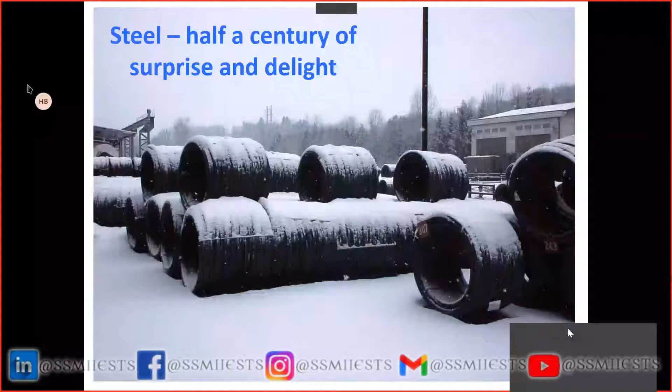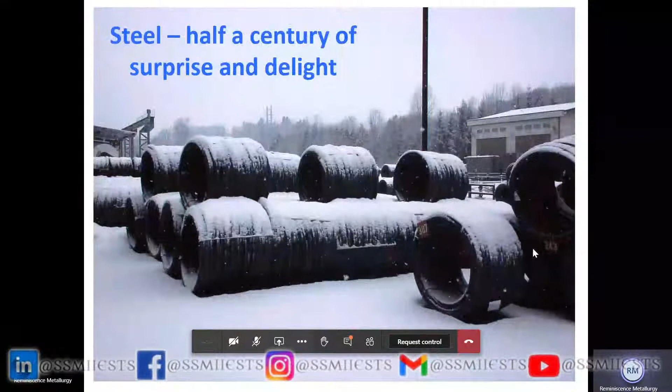Could you change to the next slide, please? I am trying, sir, but it's not moving. Let me try. Yeah, I can see it now. And if you put it on full screen.

Before I mention more recent developments, by far the largest development in steel was in the 1960s, early 1960s, in Sheffield, where microalloyed steels were invented by these characters: Terry Gladman on the left, and Irvine, Pickering, Irani, and Bob Morrison. These people invented a concept at a time when there was no industry for niobium, and they created the industry for niobium by showing that a very small concentration of a microalloying addition can dramatically change the combination of strength and toughness in steels. There are now approximately 40 billion tons of steels which are microalloyed in routine use, and they are so good that they do not fail, and therefore the public doesn't know about them.

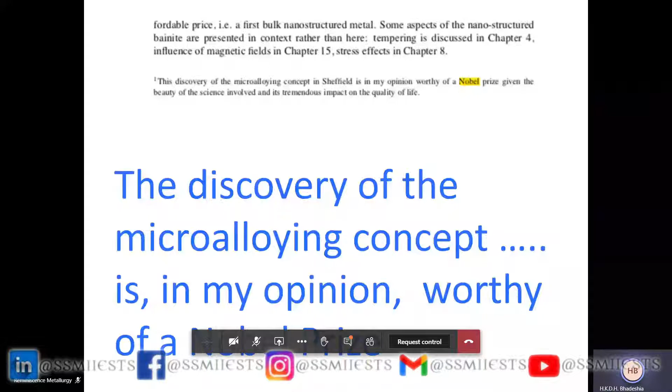This particular discovery of microalloyed steels, in my opinion, and I wrote this down in one of my books, really should have won a Nobel Prize. Because if you look at many of the Nobel Prizes we get nowadays, they don't actually create something which influences the lives of so many people. Whereas the microalloying steel concept really changed the quality of life for a very large number of people in a very big way and completely reliably.

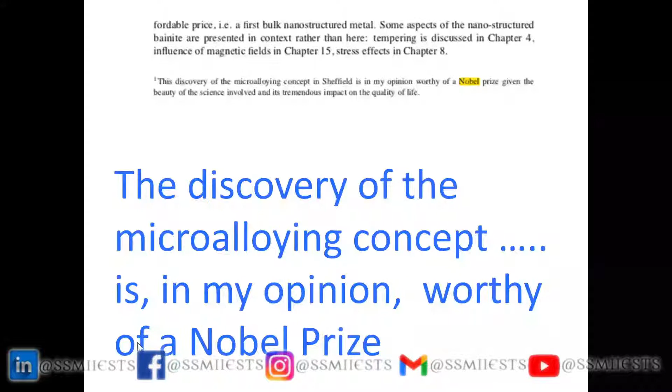Okay, next slide. Now I'll go into a few examples. Just when people think that steels have run out of ideas, this particular concept came about.

These are the twinning induced plasticity steels, where you start off with quite a small strength of the order of 300 megapascals, and then there is a work hardening mechanism which leads to a strength in excess of 1 gigapascal and an elongation of 60%. That is really quite remarkable - an elongation of 60% and a strength of about 1.2 gigapascals.

The mechanism of this work hardening is interesting. The steel contains a very large amount of manganese, and therefore it is a fully austenitic steel. It starts off deformation by mechanical twinning. Here you see a transmission electron micrograph showing extremely fine mechanical twins. This scale bar here is 1 micrometer.

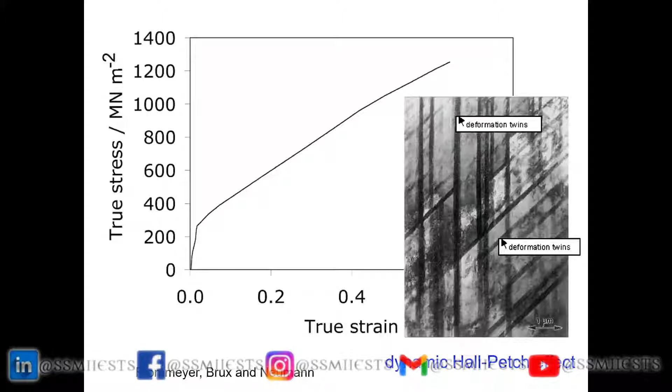What happens is that just as when we refine the grain size we get a greater strength, these twins partition the austenite into smaller and smaller compartments as deformation happens, and therefore they produce strengthening by dynamically refining the grain size. We call this a dynamic Hall-Petch effect, where the islands of austenite are divided into smaller and smaller sections by these twins. So this is the TWIP steel concept.

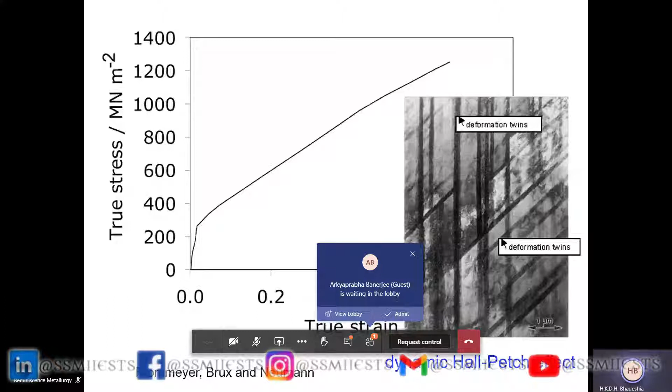If we go to the next slide, the properties are really quite amazing. On this plot, we are plotting the impact toughness versus temperature, and you can see that there is no ductile-brittle transition temperature, and even at minus 150 degrees centigrade, it has a toughness of about 100 joules on a standard Charpy notched test.

Furthermore, it has a lower density than a normal steel - about 7.3 grams per centimeter cubed as opposed to 7.8, because of the addition of silicon and aluminium. It's fully austenitic, and even at very high strain rates it behaves very well, maintaining its good toughness and elongation.

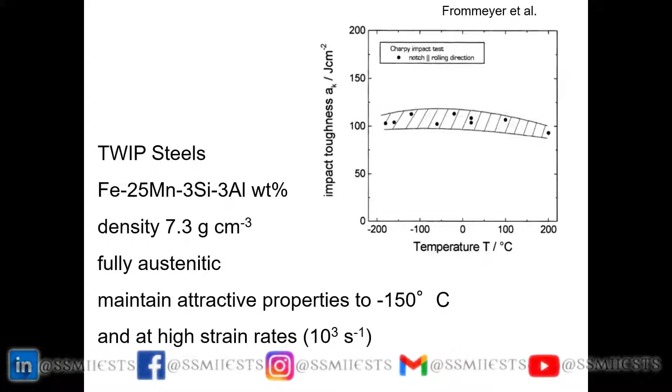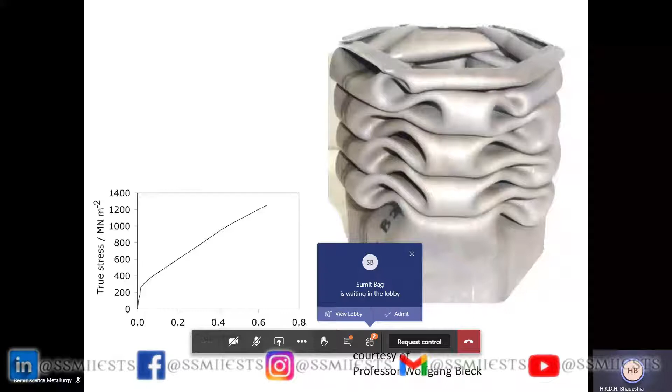Now this is a movie. The cylindrical elements that you see in the middle are made from TWIP steel. The idea is that when compartments of trains collide, the cylindrical component is extruded through a die, and therefore you get uniform deformation all across your component.

I don't know whether you can play the movie or not. Okay, if not, we can continue. So basically, there's an engineering solution as opposed to a material solution that allows a TWIP steel to absorb a great deal of energy during deformation. So we can move on to the next slide.

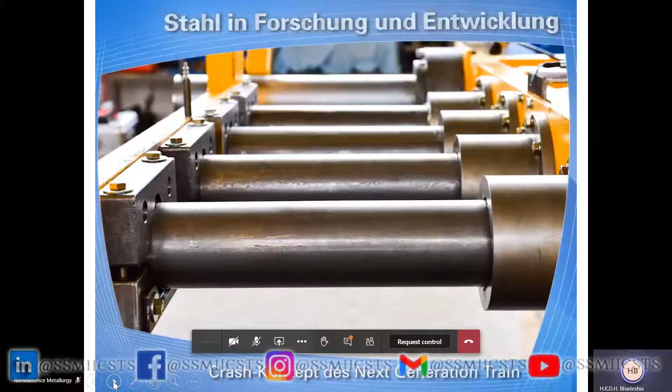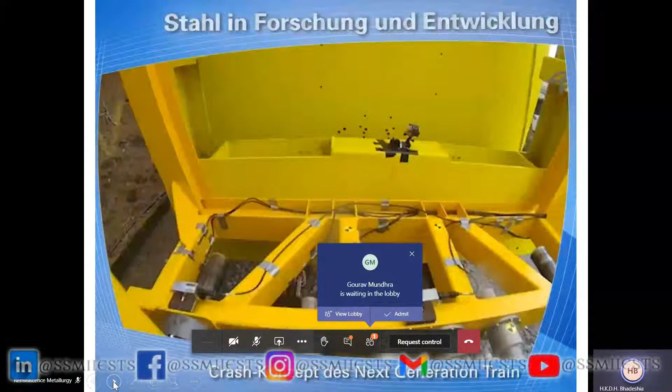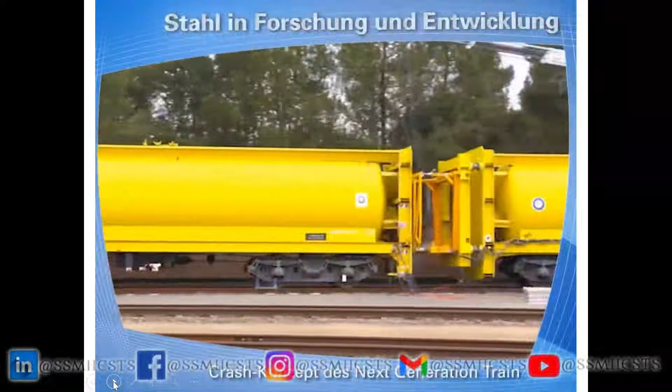Okay, so this is showing the extrusion of the cylindrical component, and this is an actual crash test. You can see those cylindrical elements made from TWIP steel being extruded into much smaller diameter during the crash. That gives uniform deformation, and therefore you exploit all of the stress-strain curve of the TWIP steel. Okay, next slide.

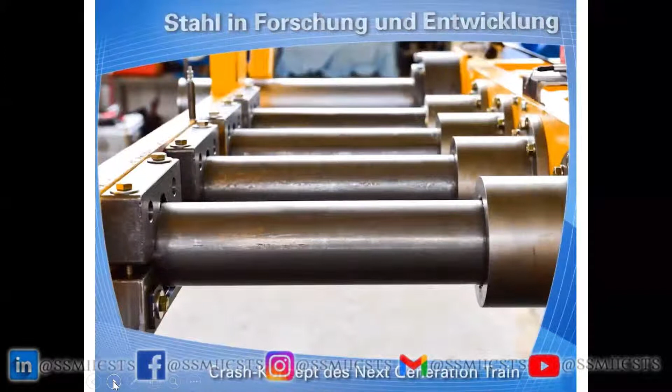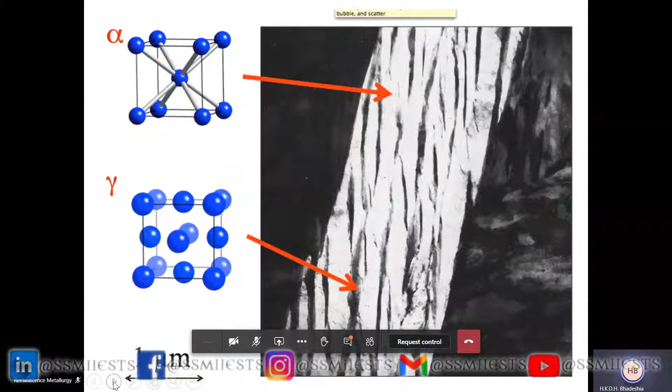You've already seen that austenite does not have a ductile-brittle transition temperature, so it's very good for toughness, whereas the very fine plates of bainite, a consequence of the mechanism of transformation, provide strength. This particular microstructure has no carbides at all, because quite a lot of silicon has been added to the steel, and silicon retards the formation of cementite. This concept has found applications in a large number of scenarios, and I'll mention two of them. But before that, I want to show you a movie explaining why these plates are extremely thin. If you go to the next slide.

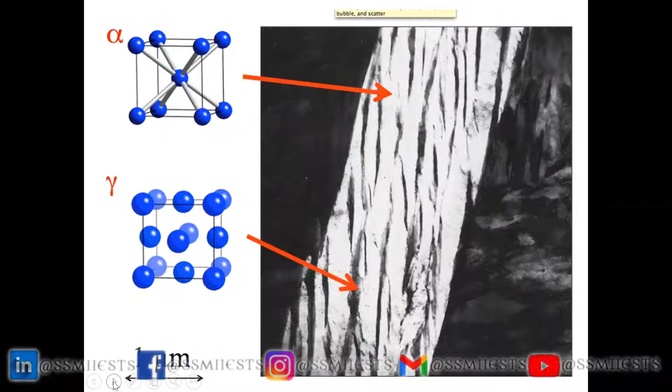If I take a sample of austenite, polish it completely flat, and allow it to transform into bainite, you can see it produces quite severe deformations. These deformations have a special characteristic: they involve a very large shear deformation. In order to minimize the strain energy associated with the shear deformation, the bainite plates form as very thin plates compared with martensite, for example.

Martensite plates generally grow all across an austenite grain, and therefore tend to be coarser. These bainite plates are only a quarter of a micrometer in thickness—just imagine getting grain refinement to a quarter of a micrometer without any imposed deformation. Processes like equal channel angular extrusion and severe plastic deformation aren't terribly useful for making a commercial steel because they focus on very small quantities of material. Here we're getting grain refinement to quarter-micrometer size simply because of the mechanism of transformation.

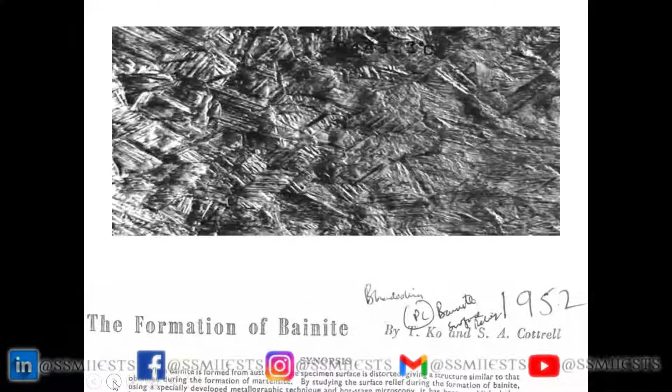If you go to the next slide—so this is a Swiss steel. We had a collaboration with them to work on this mixture of bainitic ferrite and austenite. This is an actual component for fuel injection, made from the bainitic steels, because you can engineer the properties: you can vary the thickness of the bainitic plate, you can vary the retained austenite content. So it basically opens up opportunities for very many applications.

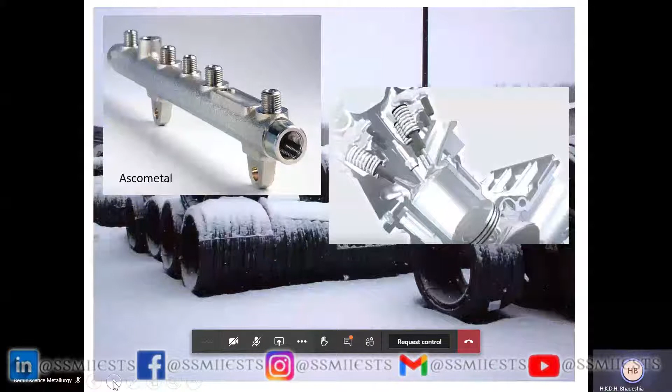And if you see the next picture, this is another actual component made from this combination of bainitic ferrite and austenite. People think of cast irons as being very brittle materials, and that's true if you have flakes of graphite and lots of cementite and so forth. But the same concept of a mixture of austenite and bainitic ferrite has been extended to cast irons as well.

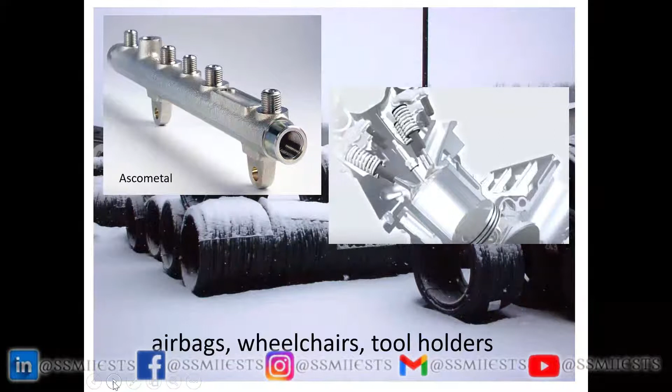So we need to go to the next slide. Here you see what's known as Austempered Ductile Iron. There's a large lump of graphite there, but the matrix has been transformed essentially into a mixture of bainitic ferrite and austenite. This cast iron—remember, this is cast iron—has a toughness of 120 joules at room temperature and a strength in excess of 1100 megapascals. This has opened up many opportunities to make complex components simply by casting, such as the component illustrated underneath.

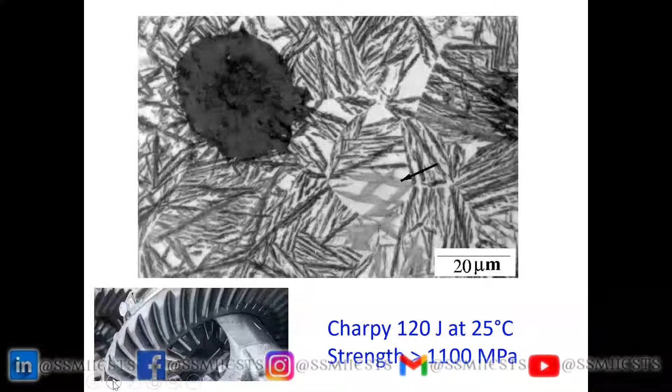This mixture of bainitic ferrite and austenite can be controlled. The various parameters that define the microstructure can be controlled very easily by altering the alloy chemistry or by altering the transformation temperature. And there's so much understood about this that you can actually do calculations. You don't need to do trial and error experiments to redesign the scale of the structure.

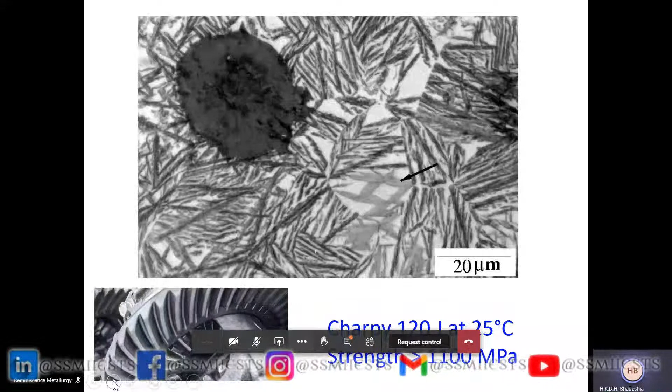If you go to the next slide, this is the world's first bulk nanostructured material. It can be produced in thousands of tons, and it consists of these bainitic ferrite plates, which are only 20 nanometers in thickness, and they are actually finer than the carbon nanotube that you see on the top right-hand side.

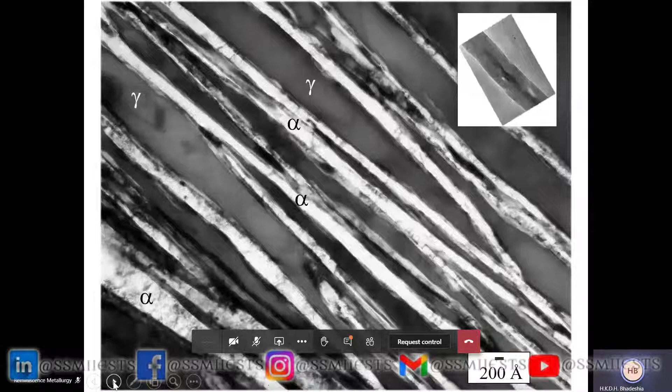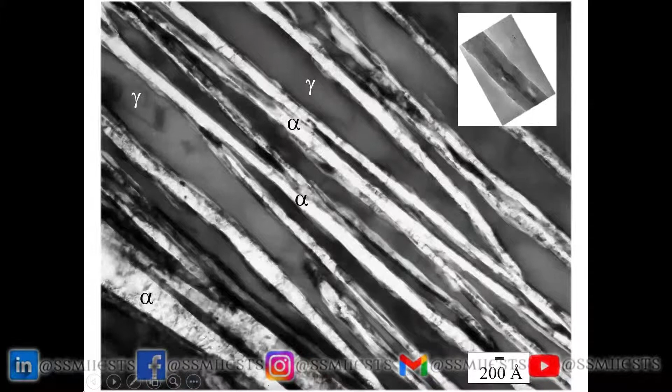So this concept has now actually been applied to one of the most critical components that you have, because wind turbines these days are really huge. The scale is enormous because the larger the wind turbine, the less is the cost per unit of electricity, and the more you capture the wind. So there are concepts in which bulk nanostructured bainite is now being applied, but there is a problem.

If you go to the next slide, it's a very major problem, that you cannot weld it, right? Because it contains about 1 weight percent carbon. So whenever you weld it, you will spontaneously get cracking. So how do we solve this problem?

We want an extremely strong steel, which at the same time has a reasonable carbon concentration, and yet we should be able to manufacture it in very large quantities. Bainitic transformation is not going to do that. It's got to be weldable.

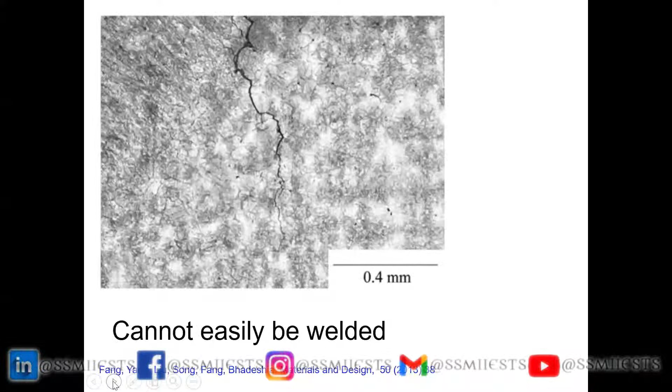That means we've got to go to lower carbon concentration, and the nanostructured bainite can only be produced at a sufficiently low temperature by adding lots of carbon. So we have to think differently. If you go to the next slide,

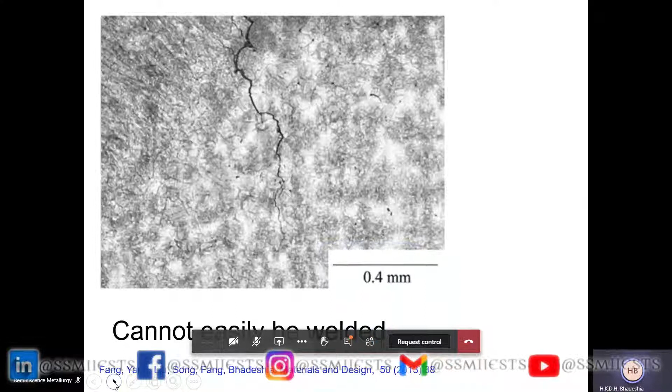This is showing martensite plates, and the martensite plates are in high carbon austenite, so you can see that they're periodically cracked.

Now, the idea is, supposing you make the austenite grain size smaller than the distance between these cracks, because these cracks happen when you're able to transfer stress onto the martensite plates. But if you make the martensite plates very fine, smaller than the distance between, then they will not crack easily under stress.

So what we need to do is to get the austenite grain size to something of the order of 1/4 of a micrometer. Now, how on earth can you get an austenite grain size in a mass-produced material, which will have a reasonably low carbon concentration, yet have a strength of 2 gigapascals and be weldable?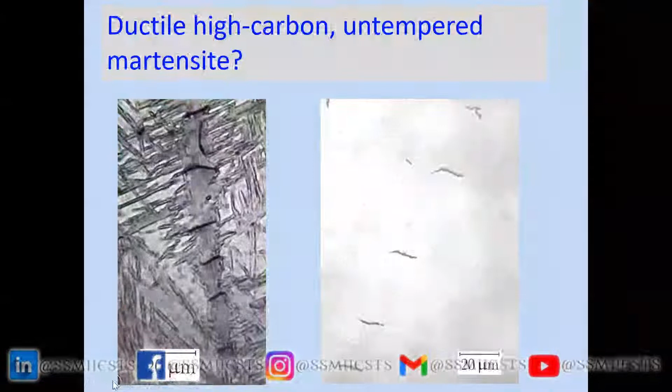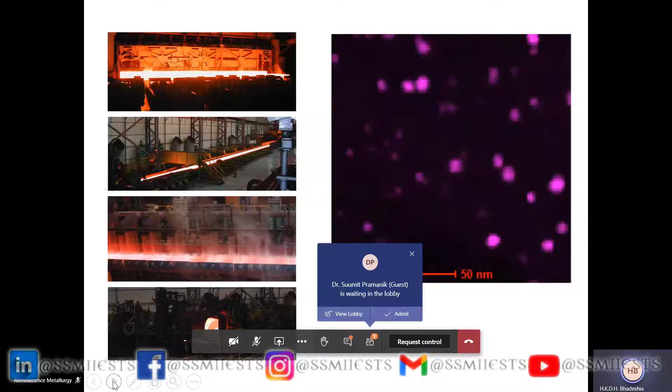If you go to the next slide, we can microalloy the steel with vanadium carbides. Why with vanadium carbides rather than niobium carbides? Because we want a finish rolling temperature that is very low, and niobium carbides generally precipitate at a high temperature when you have a high carbon concentration. So here we are talking about 0.34% carbon, and niobium carbides would be lost before the finish rolling temperature.

So what we want to do is we want to pancake the austenite grains so severely that the effective grain size becomes incredibly small. If you go to the next slide,

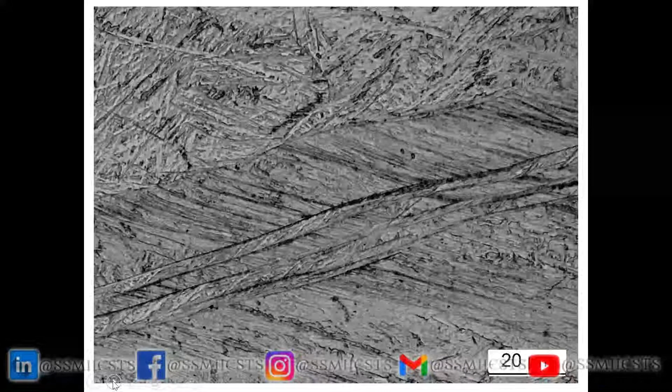This shows the beautiful structure obtained at Tata Steel in India of severely pancaked austenite grains. Not only are they severely pancaked, but there are lots and lots of deformation bands within each of those pancaked austenite grains. So what that means is that you've reduced the grain size dramatically.

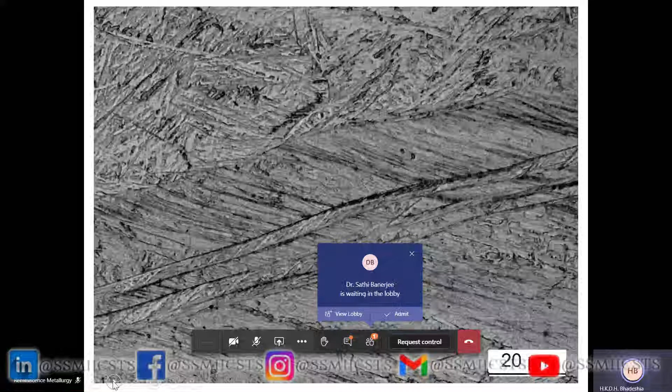And just to show you the effect, if you go to the next slide, these are EBSD figures from a single austenite grain. On the left-hand side, the grain is undeformed.

On the right-hand side, it is deformed and then transformed into martensite. So what we've done is we've broken up the martensite into very small regions in what should be a single crystal of austenite, but there are severe orientation gradients inside each austenite grain. Therefore we have broken up the 24 variants that you normally get in a single austenite grain into thousands of variants, which are misoriented with respect to each other.

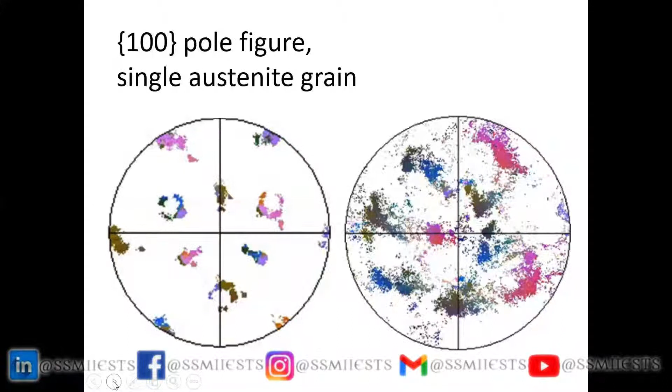This turns out to be a really remarkable material. There's no problem at all with welding it, even though it contains 0.34% carbon. This is arc welding. Laser welding has been tried, but it's not a practical tool for making structural components.

If you look at the toughness, the crosses there are for nanostructured bainite, and the new material systematically has a toughness of about 75 megapascal root meters. If you look at the Charpy results at minus 40 degrees centigrade, you've got impressive Charpy results and elongation.

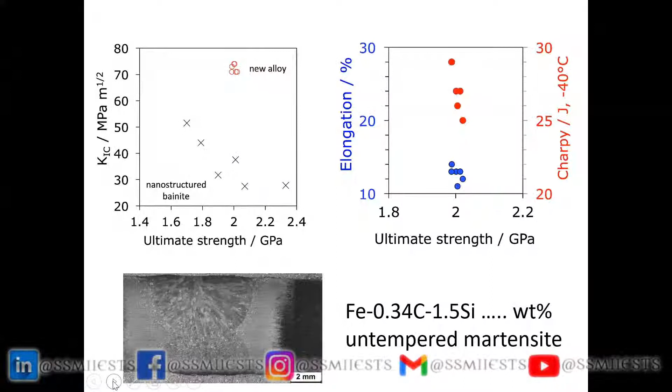Generally when an alloy is developed in a university, we start to make claims before they are justified. So this has a strength of the order of 2 gigapascals, and one of the applications we've been looking at is armor. Let's go to the next slide.

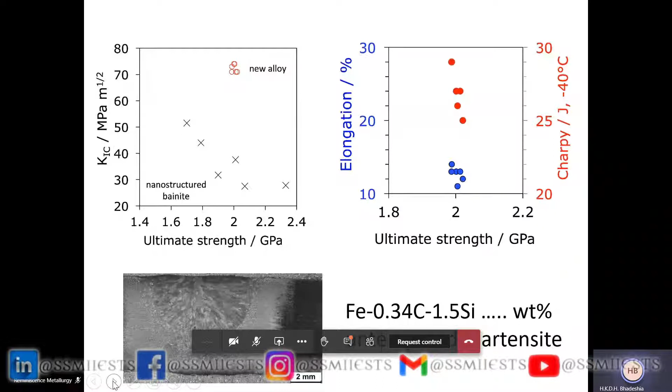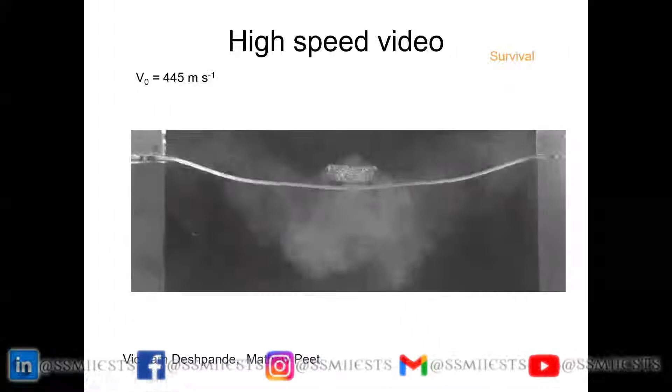And there is a movie there. So this armor is different - we want ballistic resistance, but we also want blast resistance. So we test this by firing at a very high speed an aluminum foam against a sheet of steel, and you can see that this steel does not break under that impact. So it can serve the dual purpose of blast resistance and ballistic resistance.

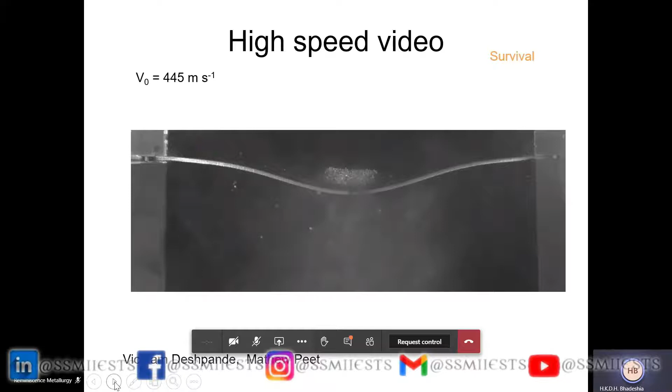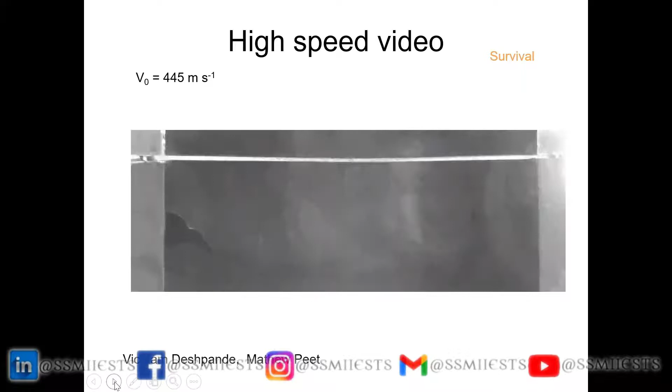But you really want to think of more than just defense applications. So if you go to the next slide, it will show you a very severe wear test.

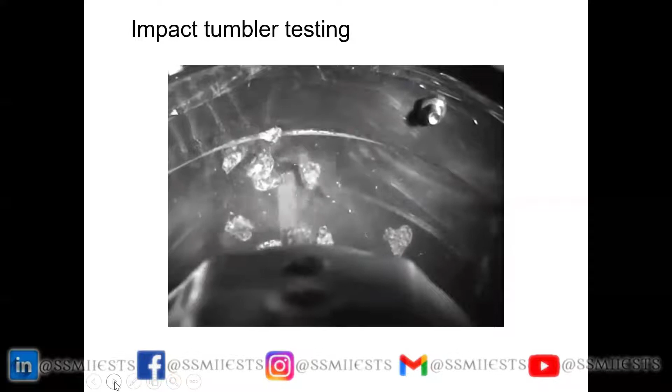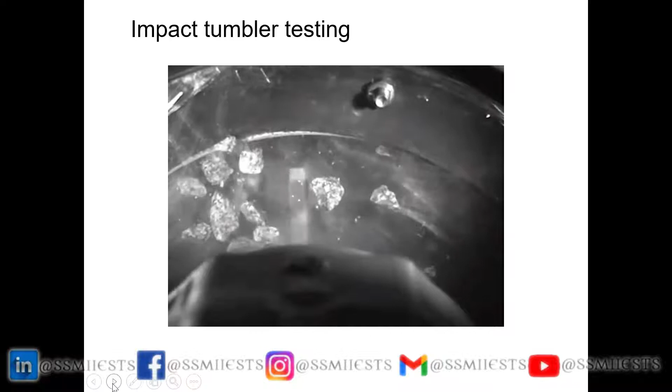The thing that's rotating around is steel samples which are hitting granite, at a very high speed. This is a slowed down version of the movie. Basically, this is a very severe test where we get both impact and abrasion, and this material proves itself to be better than anything that is commercially available.

So how do we go from a laboratory test where we are rotating steel in a tumbler containing granite, which may not be representative of real life, to a real life test. If you go to the next slide...

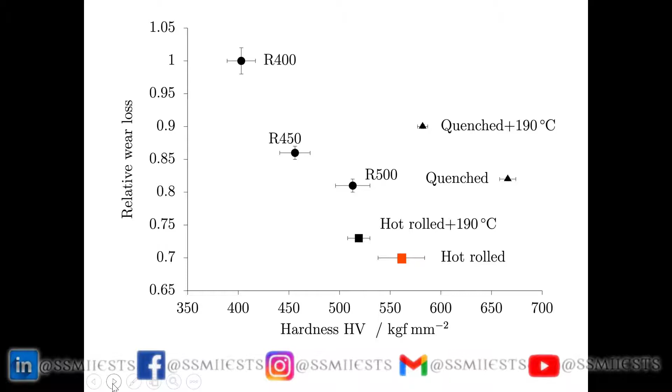And it has performed for a year without any perceptible damage. It's much cheaper than the coated steel that has been used for many years, and so far there is no damage. We are waiting for it to be damaged so that we can study how the damage happens, but it hasn't happened yet.

And this is in a real plant application. Tata Steel has now started to put this material in different parts of their factory, where different mechanisms of wear operate. So we shall see in a few years' time how this performs. And there is a plan to set up a small industry based on this. Okay, can we go to the next slide?

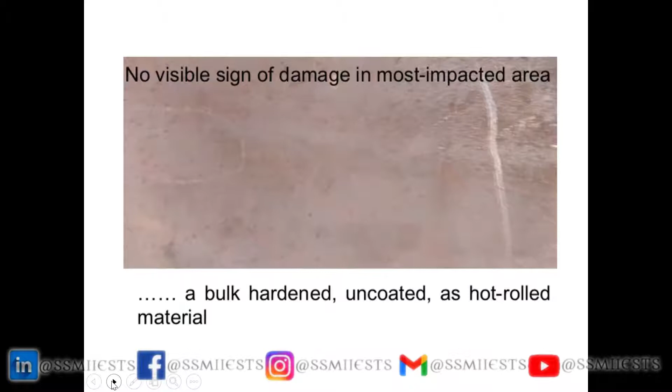Now, there are many people in the world who are working on hydrogen, but if you look at this paper, which was published in 1875, on hydrogen embrittlement - this was the very first paper ever on hydrogen embrittlement, because Johnson was trying to clean steel by putting it into acid, and discovered that afterwards the steel became very brittle, but if you left it for several days, then it would recover its properties.

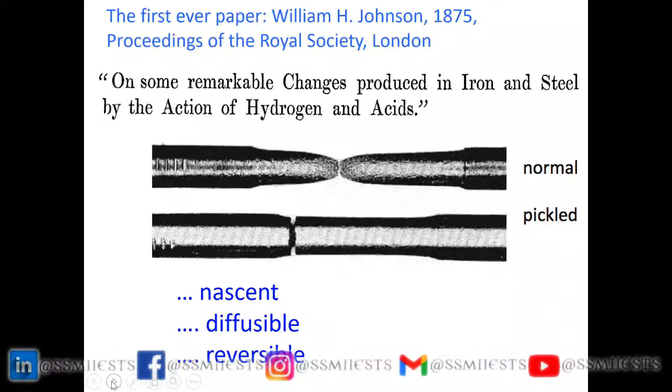90% of everything that we know about hydrogen embrittlement was already in this paper, which was about 30 or 40 pages long, but very systematic work, in 1875. So we know more or less the science of hydrogen embrittlement, although it is not a quantitative science. And my feeling is now the focus has to change to prevention of hydrogen embrittlement.

So if you go to the next slide, this is some work that we did with Nippon Steel, where we introduced very fine carbide particles whose lattice parameters are controlled so that there's a strain field around the particles, and that attracts hydrogen atoms, because Johnson proved that actually it is diffusible hydrogen that does damage.

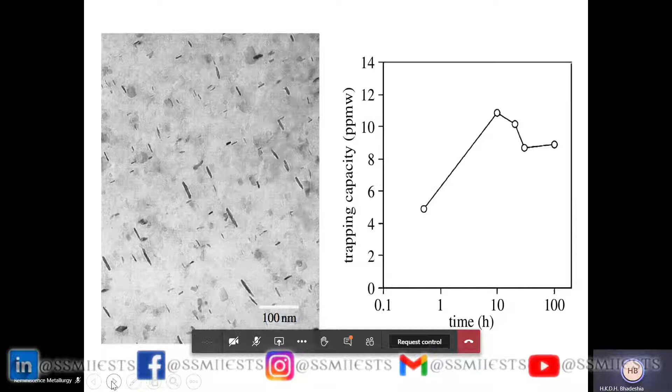So if you stop it from diffusing, then it cannot do damage, because the concentrations are remarkably small, like less than 1 part per million of hydrogen, and it's inconceivable how less than 1 part per million can actually do damage to the steel. But what happens is that when you get a crack, there's a stress field around the crack, and the hydrogen migrates towards that, so its effective concentration is greatly increased in the region which is subjected to the worst circumstances, and therefore you get embrittlement.

So if you introduce hydrogen traps inside your material, then you stop it from diffusing and you improve the properties. And the graph shows you that, with appropriate heat treatment, we can trap something like 10 parts per million of hydrogen at these traps.

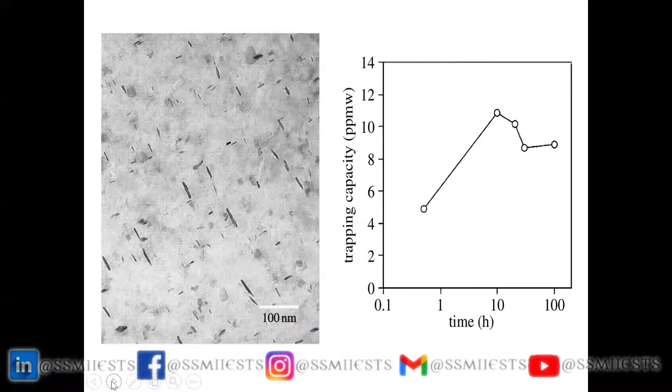If you go to the next slide, I want you to remember that to make an actual component, you never focus on just one property. So British Petroleum wanted to create a steel for undersea applications, which would be resistant to hydrogen, but would also meet all of these criteria. The engineers, when we started the project, told us that all of these criteria must be met. This is quite a long story, but to cut it short...

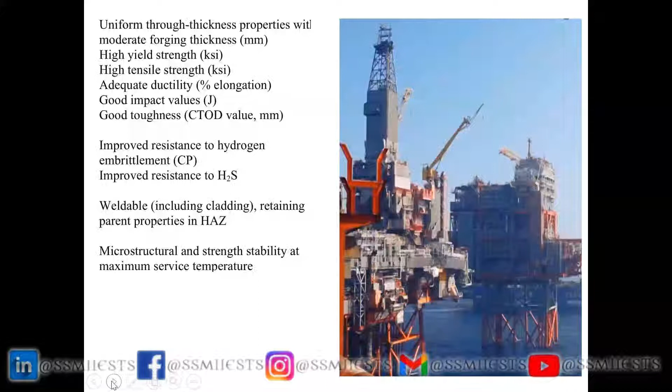If you go to the next slide, we designed a steel which meets all of those properties. So this is the normal commercial steel that BP uses, and this was the material that we created, which is higher strength and yet maintains the toughness.

And there was something called a stretch target, that means how far can we go beyond this one. And remember, it's weldable, it's got to be manufacturable in very large quantities and so forth. You can see that we have achieved the target for toughness. We can achieve much higher strength, and very severe testing has been done on the hydrogen susceptibility of this material, which relies on these hydrogen traps.

And we are at a stage where there will be manufacturing of a large amount of the steel. We still need a collaborator to actually make the components, because these components weigh tons. So this looks promising on every indicator that you would like. We have a steel company which would make the material, and there are negotiations to work with a forging company to actually produce the component. Until you've done a component level test, you can't actually claim that you have achieved success.

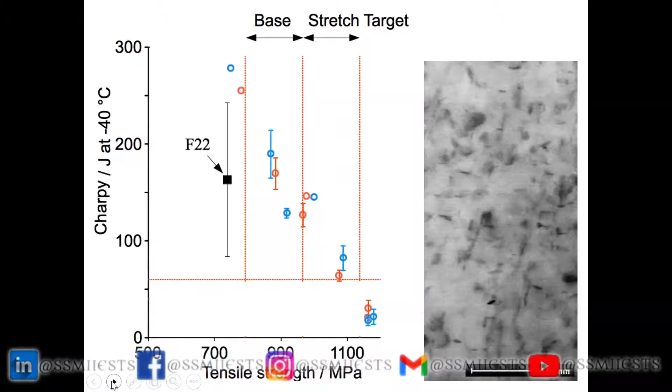Now, I've shown you examples where steel design can lead to really interesting practical applications. The next slide, I'm going to show you some fundamental results.

So this is the mechanism of the bainite transformation on the left. The plate forms like martensite, it then partitions carbon, and then you get cementite precipitation. You can suppress the cementite precipitation by adding silicon or aluminum. And the phase diagram on the right shows that the solubility of carbon in ferrite that is in equilibrium with austenite is incredibly small, the maximum is about 0.028%. So this is just a part of the equilibrium iron carbon phase diagram.

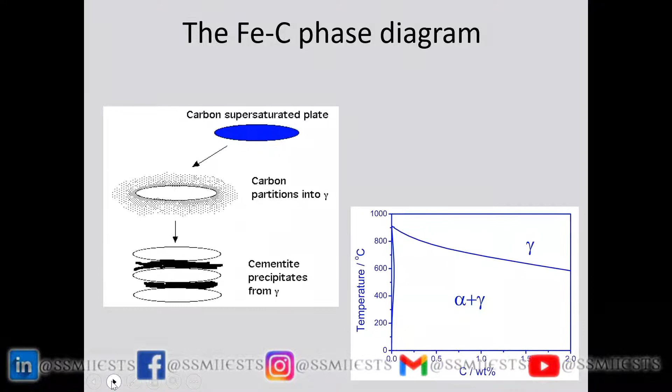Next slide. These are experiments I did back in 1981 with Bob Waugh, where we used the atom probe, and the image on the bottom right-hand side shows the carbon atom segregated into the austenite, and the ferrite has lost much of its carbon. But if you do a lot of experiments, you find that actually the concentration of carbon in the ferrite is very high. And we assumed back in 1981 that this was because it was trapped at dislocations.

And since 1981, the instruments have become more sophisticated. So if we go to the next slide.

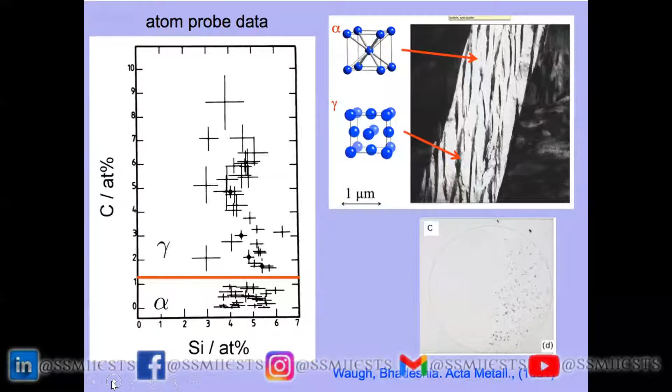This is Francisca, who did this work. Using more sophisticated instruments, you can see the segregation to dislocations in the ferrite, but you can also see large concentrations of carbon which are in solid solution inside the bainitic ferrite. When I say large concentrations, it's up to 0.38%.

Now, why would it remain there, even though we are holding at the transformation temperature for 10 days? Why does it remain there? Recently, there was a paper published in one of the Nature journals saying it must be because the carbon is trapped at vacancies. But you can do a very simple calculation to show that the fraction of carbon atoms that are trapped at vacancies will be incredibly small. So there has to be another reason why the carbon remains.

There has to be another reason why the carbon remains inside the ferrite, even though you give it every opportunity to partition. So the idea that occurred to me was, if you introduce carbon in ferrite, then the ferrite will be tetragonal. We should not think about equilibrium between body-centered cubic ferrite and austenite, but rather equilibrium between tetragonal ferrite and austenite. So I got my colleagues in South Korea to do first principles calculations. If you go to the next slide, please.

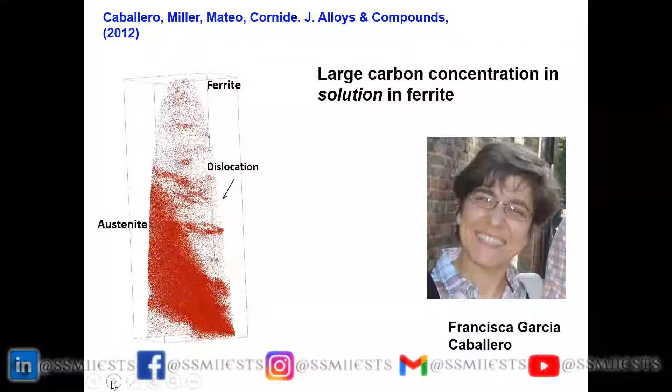So these are calculations of a phase diagram between tetragonal ferrite and austenite. Now you can see that the solubility of the ferrite increases dramatically when it's tetragonal. And we did a lot of experiments, and others have repeated these experiments to show, yes, indeed, the ferrite is tetragonal.

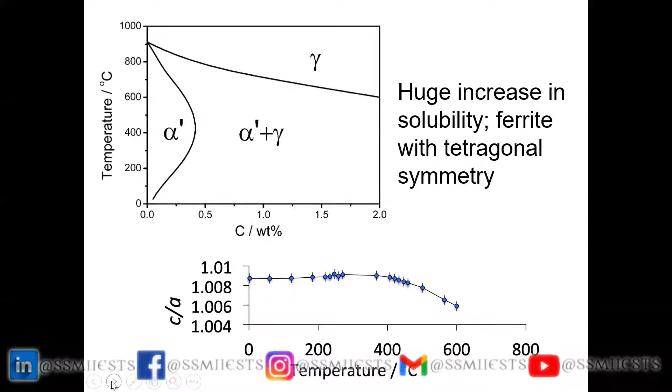Now, when we try and create a university, people often think that it's the amount of money that the university has which matters. But actually, it's all the students that have been taught since 1856 that really is the human output, which matters more than anything else. So I want to congratulate you on your very long history, and certainly for 80 years in materials or metallurgy. I hope this continues for many more centuries. So thank you very much.